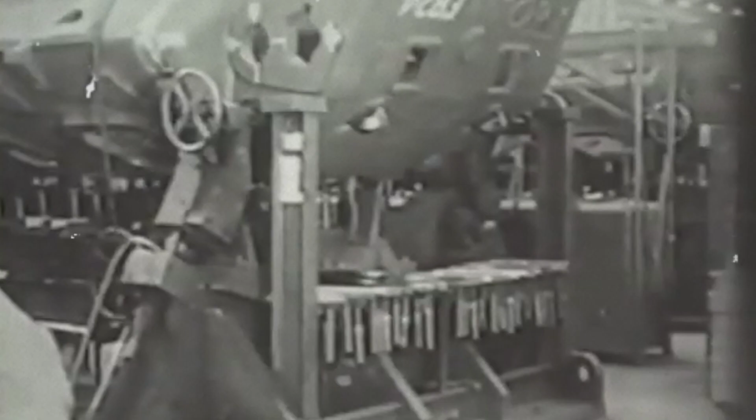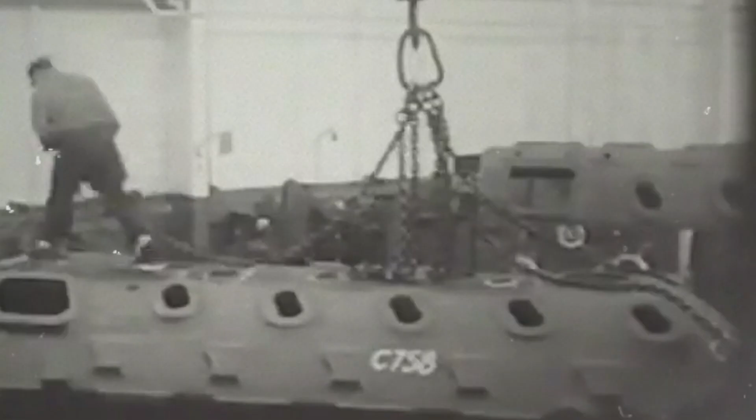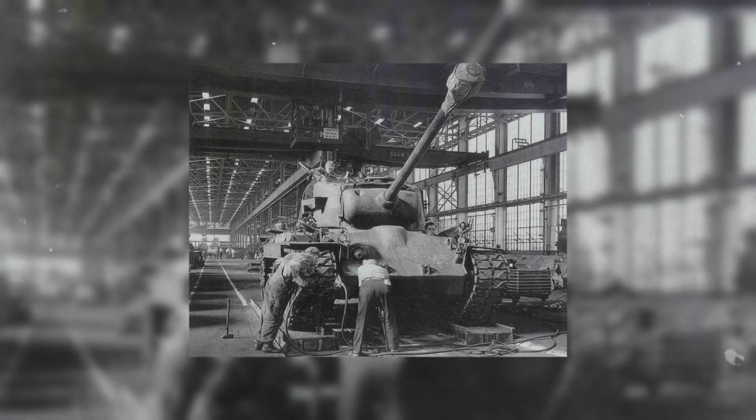July 1st, 2013. The final welding machines at the Grand Blanc facility powered down, leaving a deafening silence across 1.6 million square feet of concrete. There were no ceremonies, no grand farewells, just a padlock on the gate of a factory that once saved the free world.

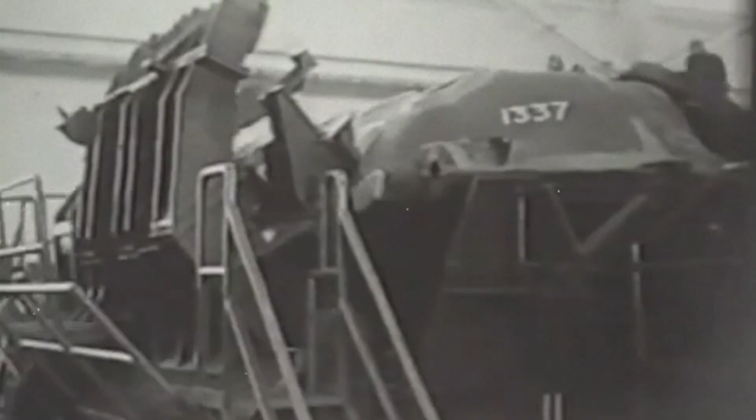Seven decades earlier, this exact ground was the beating heart of the arsenal of democracy. At the height of the Second World War, thousands of workers labored relentlessly to forge over 11,000 Sherman and Pershing tanks, turning the tide of global conflict. It was an unstoppable colossus of American manufacturing, providing generations of secure livelihoods.

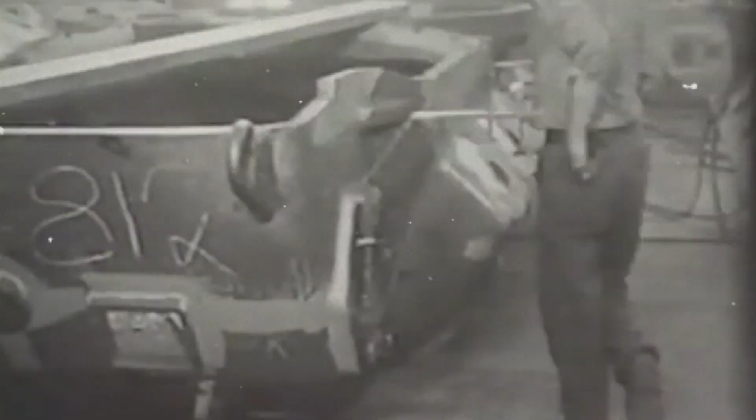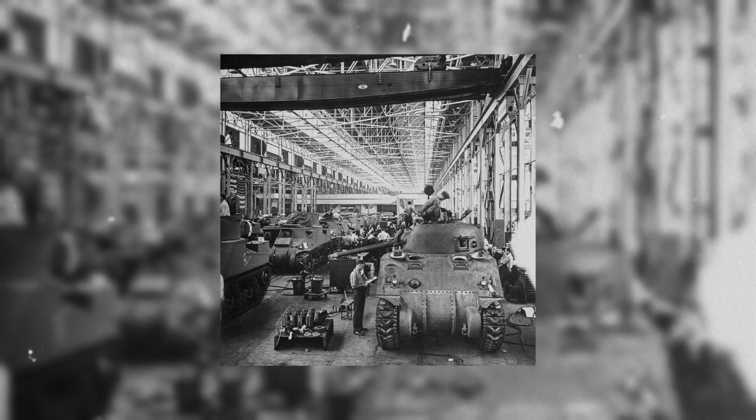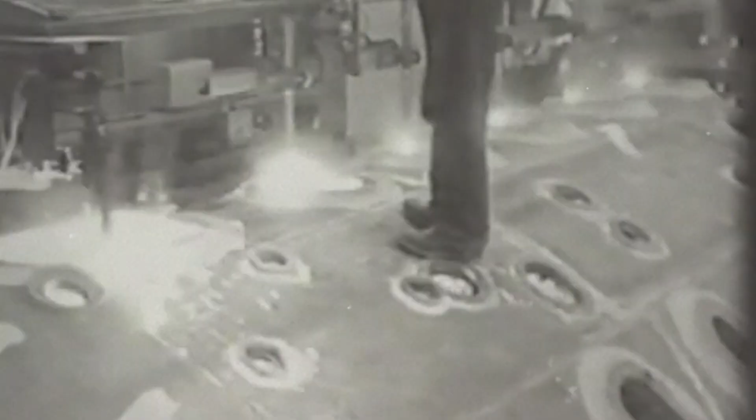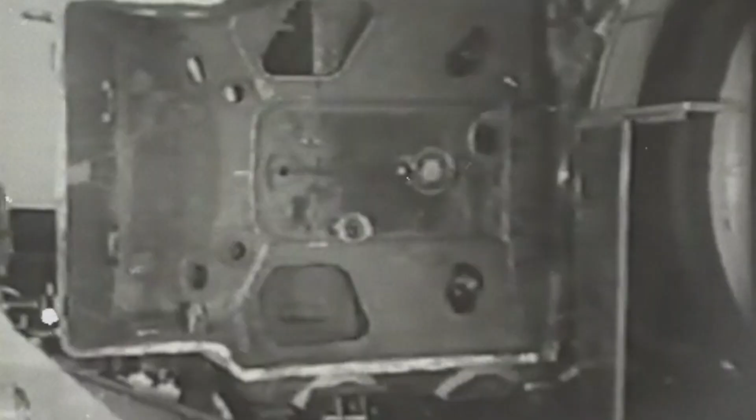Today, the legendary assembly lines have been erased. From thousands of skilled jobs, the employment roster plummeted in a devastating freefall to absolute zero. A fortress built to defend a nation was ultimately leveled to the ground, replaced by a barren commercial parking lot. How does an industrial titan that survived World War II, the Cold War, and decades of economic turbulence simply vanish? It wasn't destroyed by foreign artillery or global enemies. It was quietly executed by its own parent company, dismantled by a single corporate mandate to optimize profit margins.

Grand Blanc, Michigan, 1942 to 2013. This is the saga of an American manufacturing miracle, a story that reveals the brutal truth of what happens when a community's proudest legacy collides with the ruthless reality of a corporate balance sheet.

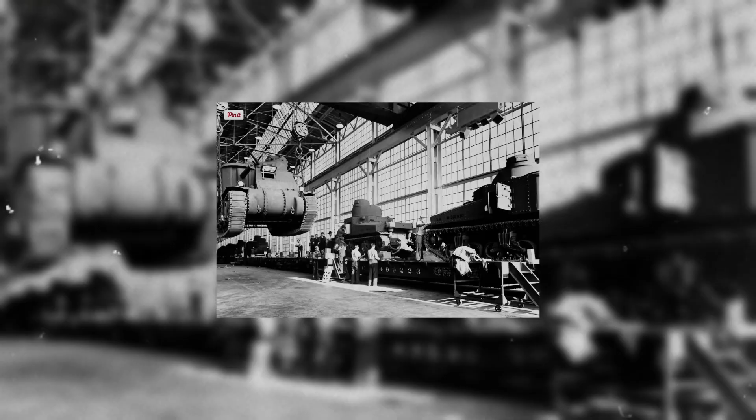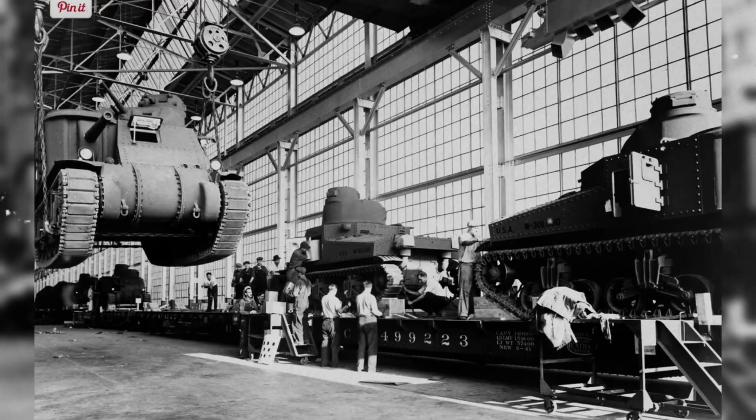In the final weeks of 1941, the wind howling across the rolling plains of Genesee County, Michigan, carried nothing but the biting cold of an approaching winter. Grand Blanc was a quiet, unassuming agricultural community, home to sprawling dairy farms, dirt roads, and families whose lives were dictated by the seasons and the harvest. For generations, the loudest sound echoing across these snow-dusted fields was the rumble of a distant freight train or the slow churn of a tractor. It was a place fundamentally disconnected from the geopolitical infernos raging across the Atlantic.

Yet beneath the serene, frost-covered surface of this rural landscape, an industrial metamorphosis of unprecedented scale was about to unfold. As the shadow of the Second World War lengthened over Europe, the United States government realized that its traditional military arsenals were dangerously inadequate. The mechanized blitzkrieg tactics that had rapidly dismantled European defenses required a response in kind, a massive, overwhelming mobilization of armored vehicles.

Washington recognized that the only force capable of producing complex machinery at such a staggering volume was the American automotive industry. The government turned its eyes toward Detroit, the undisputed manufacturing capital of the world, and specifically to General Motors. Within GM, the Fisher Body division, renowned for its precision engineering and mass production of automobile chassis, was handed an impossible mandate: stop building passenger cars and start forging 30-ton monsters of steel.

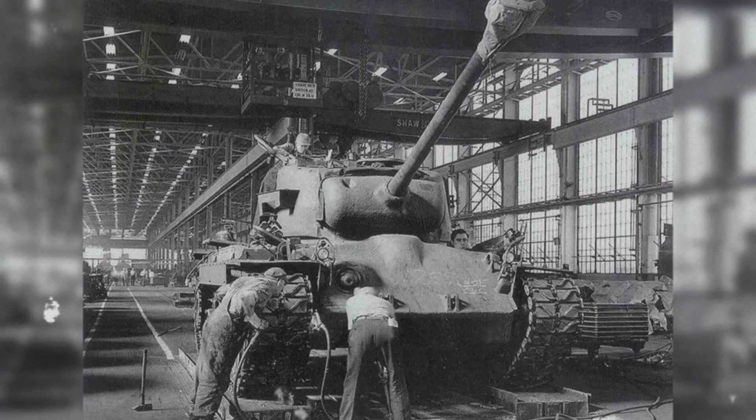After surveying multiple locations, General Motors and government planners settled on a vast tract of farmland in Grand Blanc. The location was strategic, offering hundreds of acres of open land necessary for a colossal building footprint and a private tank testing ground, while remaining closely connected to the deep industrial supply chains and railway networks of nearby Flint and Detroit. In November 1941, the first fleets of heavy earth movers and bulldozers arrived in Grand Blanc, tearing into the frozen topsoil. The initial construction schedule was already incredibly aggressive, driven by the looming threat of global conflict.

But on the morning of December 7, 1941, everything changed. The attack on Pearl Harbor shattered the illusion of American isolationism. The nation was suddenly at war, and the timeline for the Grand Blanc plant elevated from an urgent priority to a matter of desperate national survival.

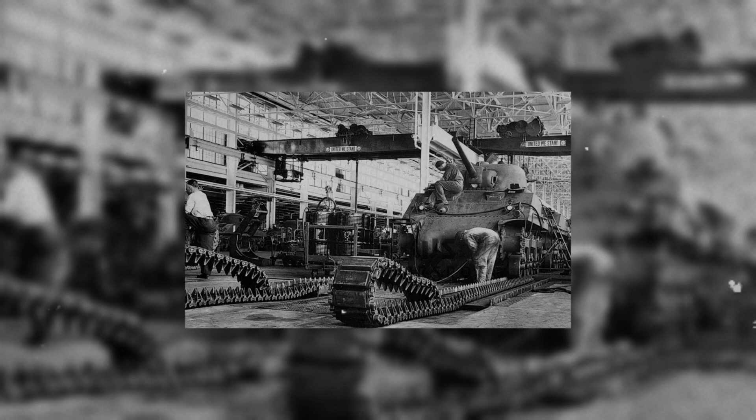Through one of the harshest Michigan winters in recent memory, construction crews worked around the clock in brutal, freezing conditions. Powerful floodlights illuminated the muddy, snow-swept construction site 24 hours a day, casting long shadows as thousands of laborers poured concrete and welded structural steel. They fought against blizzards, freezing temperatures that threatened to ruin the concrete foundation, and the constant crushing pressure of a wartime deadline. Yet the framework of an industrial titan began to rise against the gray winter sky.

The sheer scale of the undertaking was difficult for the local residents to comprehend. Where dairy cattle had grazed just months prior, a sprawling 452,000 square foot manufacturing complex was taking shape. The architecture was utilitarian, heavy, and imposing, designed not for aesthetics, but to withstand the immense internal forces of heavy industrial manufacturing.

Massive overhead cranes, capable of lifting entire tank hulls, were installed into the reinforced steel rafters. Deep concrete pits were excavated to house the heavy machinery needed to stamp and shape armored plating. By early 1942, an absolute miracle of American engineering and labor had been achieved. In a fraction of the time it would normally take to plan and build a facility of this magnitude, the Grand Blanc Tank Plant was structurally complete and ready for its internal tooling.

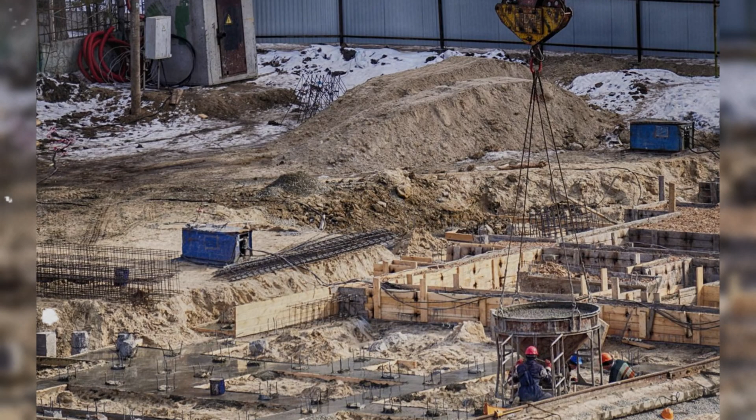The rural silence of the community had been permanently shattered. Freight trains now rumbled continuously down the newly laid spur tracks, delivering thousands of tons of raw steel, heavy machinery, and vital components. Simultaneously, a massive demographic shift occurred. As the factory doors prepared to open, thousands of workers descended upon the small town. They came from the automotive assembly lines of Flint, from the struggling farms of the Midwest, and from across the country, drawn by the call of wartime duty and the promise of steady wages. Men and women alike walked through the newly erected gates, ready to learn the dangerous and demanding trade of building war machines.

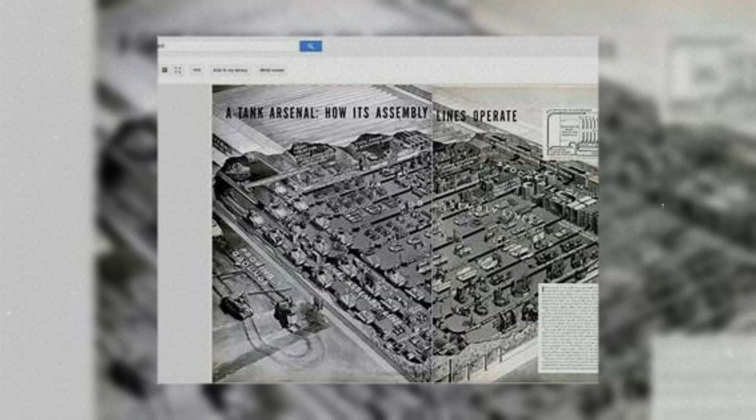The winter of 1941 to 1942 marked the permanent awakening of Grand Blanc. It was no longer just a farming community. It had been drafted into service as a vital organ in the arsenal of democracy. The stage was set, the massive electrical grids were powered up, and the heavy doors were unlocked. The quiet fields had been transformed into an industrial fortress, standing ready to forge the weapons that would soon dictate the fate of the free world.

The true test, however, was only just beginning as the first raw steel rolled onto the assembly floor. By the spring of 1942, the freezing mud of the Michigan construction site had solidified into the concrete floor of the free world's newest and most formidable armory. The Grand Blanc Tank Plant was no longer a hastily drawn blueprint. It was a living, breathing, mechanical behemoth.

Walking onto the production floor was an absolute assault on the senses. The cavernous air was thick with the acrid blue smoke of industrial welding and the heavy metallic scent of machine oil. The noise was a physical force, a relentless, deafening cacophony of drop hammers, grinding steel, and the synchronized shouting of foremen struggling to be heard over the industrial din. This was the Fisher Body Division, doing what it did best, but on a scale that defied all previous comprehension. General Motors had successfully transplanted the DNA of the automotive moving assembly line into the brutal calculus of mechanized warfare.

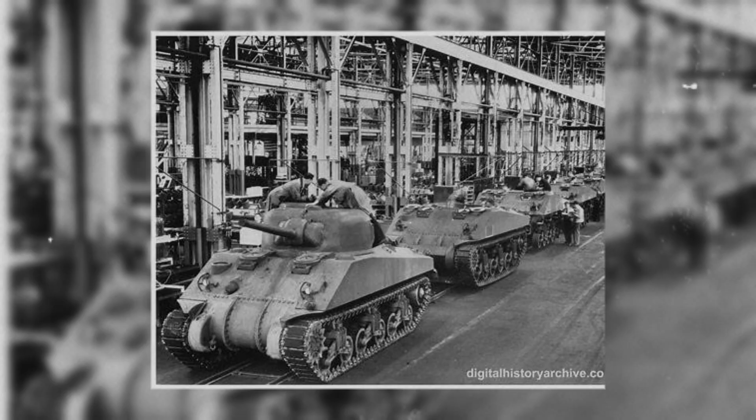At the center of this organized chaos was the M4 Sherman tank. Before Grand Blanc, tanks were often built in small batches, pieced together in specialized workshops like bespoke, deadly vehicles. The new facility changed the global paradigm entirely. Here, 30-ton monsters of steel were birthed in a continuous, flowing process. Giant overhead cranes hoisted massive cast steel hulls into place as if they were hollow toys.

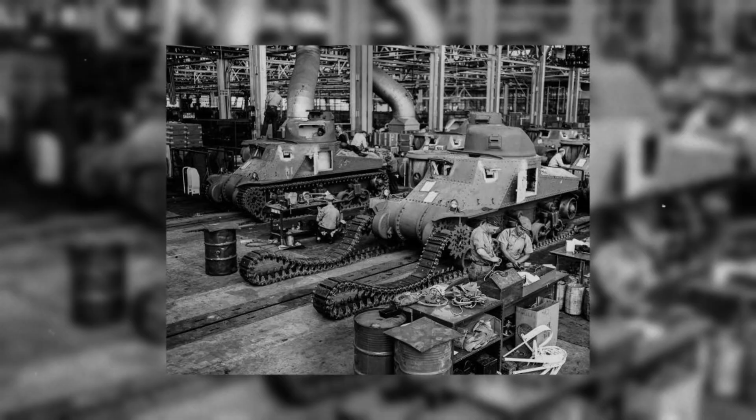As the chassis moved slowly down the line, a synchronized army of workers descended upon it. They dropped in massive radial engines, secured complex transmission assemblies, and lowered the heavy, rotating turrets onto their iron rings. It was an industrial ballet choreographed by desperation and driven by patriotism. The factory's unique layout allowed raw materials to enter at one end and fully functional, battle-ready war machines to roll out the other, straight onto waiting flatbed rail cars destined for the ports of the East Coast.

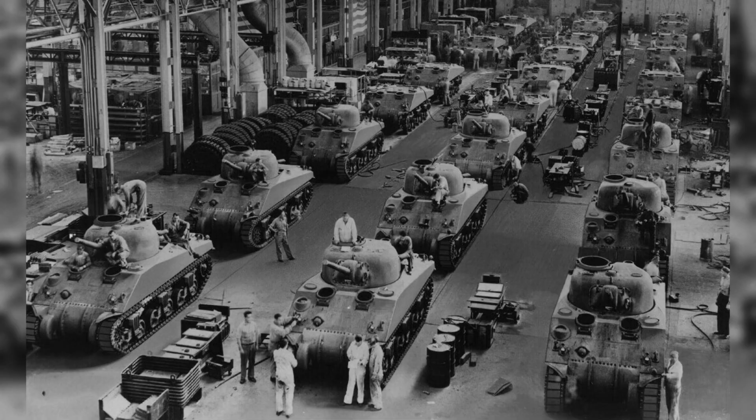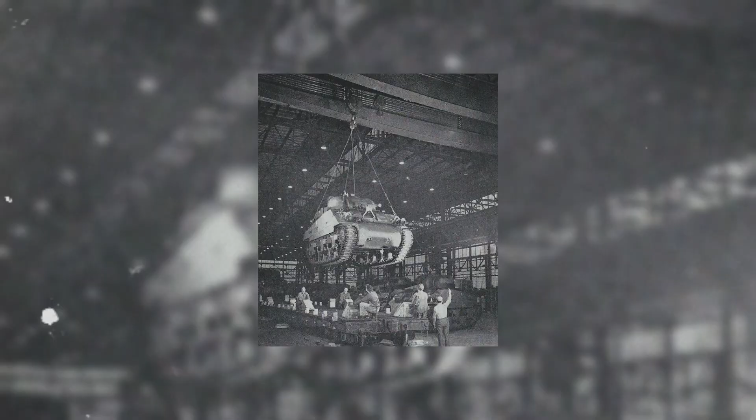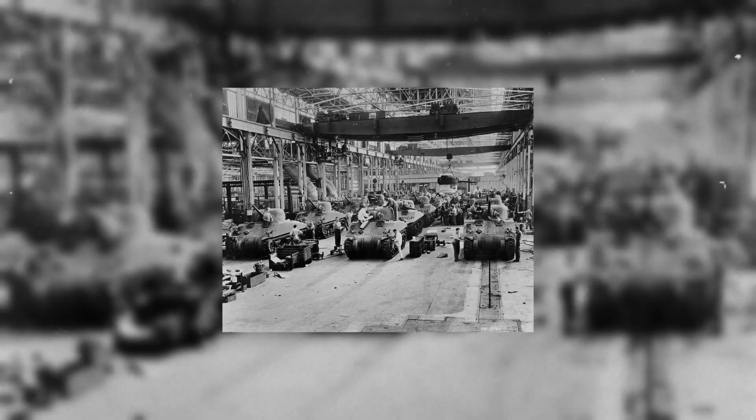But the true heartbeat of the Grand Blanc Tank Plant was not its machinery. It was the people who operated it. The insatiable demands of the global conflict had severely drained the traditional male workforce, pulling young men from the factory floors to the front lines. To fill the gaping void, the demographics of American manufacturing shifted practically overnight. Women, many of whom had never set foot inside a heavy industrial facility, answered the call in the thousands. They strapped on heavy leather aprons, pulled down protective welding masks, and picked up heavy riveting guns. They became the vital backbone of the arsenal of democracy.

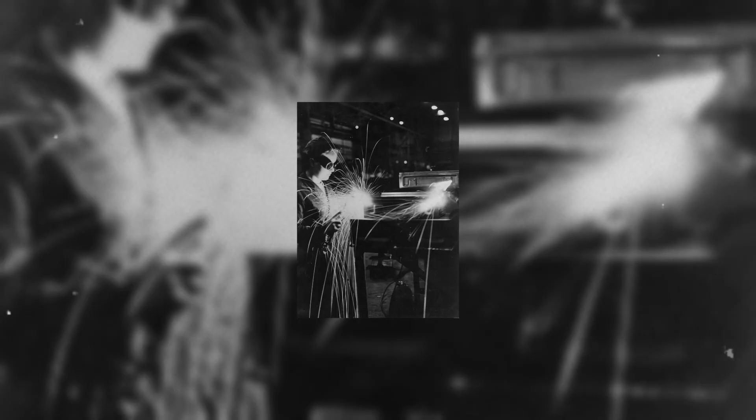Former shop clerks, farmhands, and housewives were suddenly tasked with executing precision welds on inch-thick armor plating, welds that absolutely had to hold together when struck by German artillery shells across the Atlantic. They worked grueling, 12-hour shifts, often 6 or 7 days a week, fueled by the stark realization that the lives of American soldiers depended directly on the quality of their daily labor.

As the war raged on, the battlefield reality in Europe shifted, and the plant had to pivot. Reports from the front lines indicated that the highly reliable Sherman was being outgunned by heavier, more heavily armored German tanks like the Panther and the Tiger. The military demanded a rapid response, and Grand Blanc delivered.

The plant's engineers and floor workers executed a staggering feat of industrial agility, retooling the massive assembly lines to produce the M26 Pershing, a heavier, wider tank with a devastating 90mm gun and significantly thicker armor. Switching production lines for passenger cars usually took months of careful planning and downtime.

Doing it for heavy tanks in the middle of a global war was a logistical miracle. Yet the workers adapted, wrestling with larger components and tighter tolerances without ever letting the assembly lines stop. By 1945, the factory had reached a crescendo of productivity that permanently cemented its legendary status in military history.

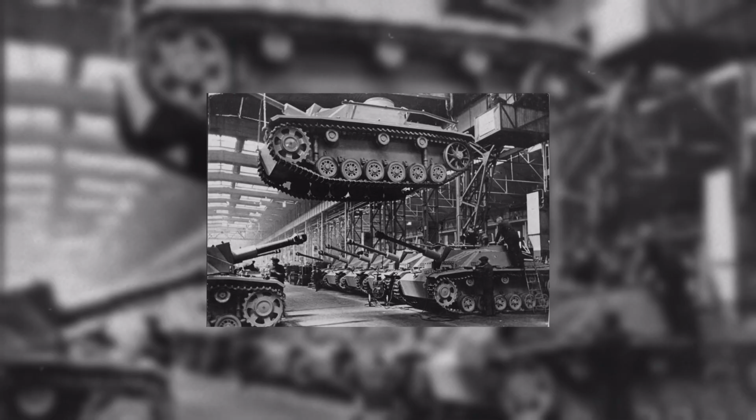The output numbers were staggering. From the moment the first tank rolled off the line to the final days of the conflict, the workers at Grand Blanc forged over 11,000 armored vehicles. If lined up bumper to bumper, this steel armada would stretch for miles. They had built enough armor to equip entire armies, single-handedly outproducing the combined industrial output of several Axis nations.

The facility had fulfilled its mandate flawlessly, transforming a quiet Michigan farming community into one of the most critical military-industrial nodes on the planet. But the very success of the Grand Blanc Tank Plant carried the seeds of an inevitable and immediate crisis. In August 1945, the devastating atomic explosions in the Pacific brought the Second World War to a sudden, dramatic end.

Across the nation, people flooded the streets in jubilation. But inside the cavernous walls of the Fisher body plant, the news brought a complex mixture of immense relief and profound anxiety. The government, suddenly lacking enemies to fight, instantly canceled billions of dollars in military contracts.

Within weeks, the deafening roar of the assembly lines began to falter. The massive moving tracks slowed, then stopped completely. The relentless influx of raw steel dried up. The thousands of men and women who had poured their sweat and sanity into building the arsenal were suddenly handed pink slips, their patriotic duty fulfilled, but their economic futures entirely uncertain.

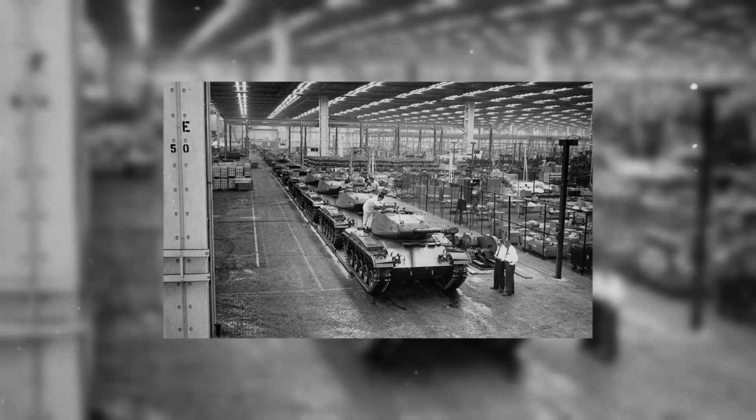The pivot was violent and immediate. The Buick spare parts were hastily cleared out, and the factory floor was radically reconfigured for a new era of mechanized conflict. The government tasked the plant with producing the M48 Patton, a formidable, state-of-the-art medium tank designed specifically to counter Soviet aggression. The M48 was heavier, more heavily armored, and vastly more complex than anything Grand Blanc had produced during the Second World War.

It featured a massive 90mm main gun, a newly designed precision suspension system, and an intricately cast elliptical hull intended to deflect advanced anti-tank munitions. The reawakening of the plant brought a wave of economic relief back to the community. The sprawling parking lots filled once again, and the familiar, deafening roar of industrial production returned to Genesee County.

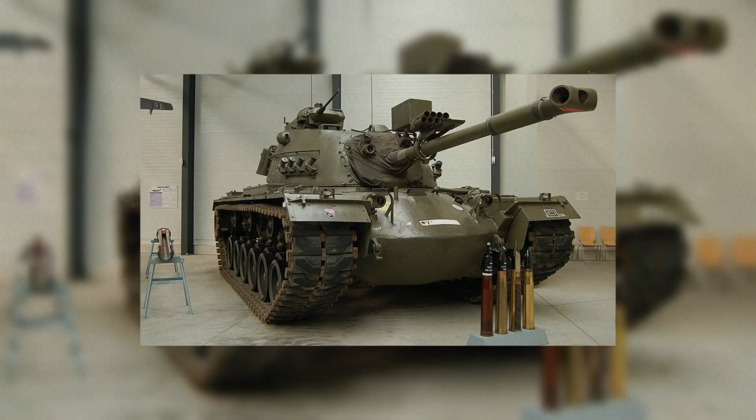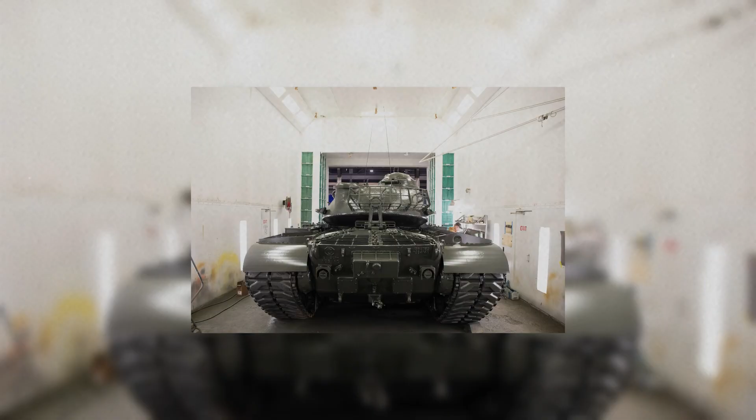Many of the veteran workers from the 1940s returned to the lines, their faces a little older, but their hands just as steady. They were joined by a new generation of welders, machinists, and assemblers, all united by a renewed sense of urgency. Over the next 5 years, the facility operated at a blistering pace, churning out an impressive armada of over 4,200 M48 Patton tanks. These machines rolled off the Grand Blanc assembly lines and directly into the tense, freezing battlefields of Korea, as well as onto the heavily fortified borders of West Germany, standing as the frontline deterrent against a potential Soviet invasion of Western Europe.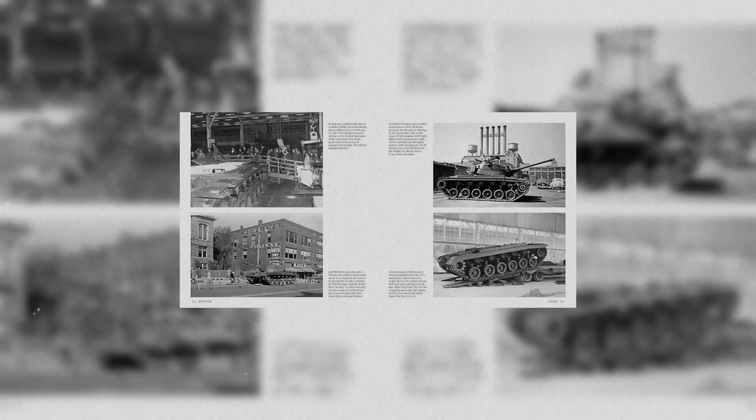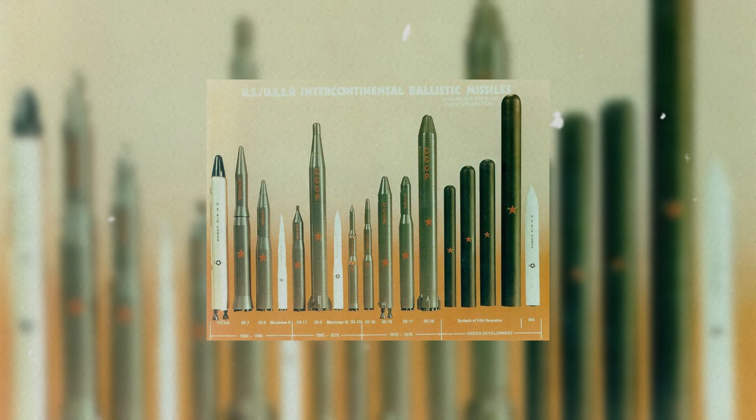Yet even as the production numbers soared and the facility proved its worth a second time, an invisible, strategic shift was quietly rendering the plant's core purpose obsolete. By the mid-1950s, the doctrine of global warfare was fundamentally transforming. The advent of thermonuclear weapons, intercontinental ballistic missiles, and advanced supersonic bombers shifted the Pentagon's focus away from massive, land-based armored engagements. The military-industrial complex was redirecting its vast resources toward the skies and the edge of space. The government realized it no longer needed to maintain a colossal, dedicated tank manufacturing facility operating at full capacity in Michigan.

In 1955, the fatal decree was handed down. Tank production at the Grand Blanc facility would be terminated. This time, there would be no temporary pause, no warehousing phase, no mass waiting for the next conventional conflict. The United States government was officially pulling its military vehicle contracts from the plant for good. For the second time in a decade, the massive assembly lines ground to a halt.

But this shutdown carried a far more existential dread for the thousands of workers clocking out. The facility was entirely specialized for military heavy manufacturing. Its electrical grids, its foundation weight limits, and its internal architecture were all engineered around moving 30 and 40-ton pieces of solid steel. It was a machine built exclusively to build machines of war. With the military permanently walking away, the Grand Blanc Tank Plant was plunged into a desperate crisis. It faced a stark and brutal ultimatum from corporate headquarters: execute a massive, prohibitively expensive structural metamorphosis to serve the civilian consumer market, or shut its doors forever, leaving its workforce stranded in the economic wreckage of the Cold War. The era of the tank was over, and the facility's fight for its own survival had just begun.

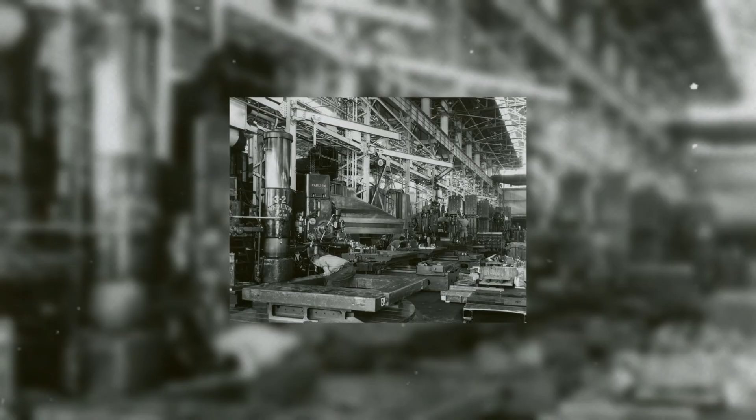In 1955, the Grand Blanc facility stood on the precipice of oblivion. The military had permanently severed its contracts, and the massive concrete floors were once again enveloped in a chilling silence. General Motors faced a critical crossroads: permanently shutter the sprawling complex and lay off thousands of loyal workers, or engineer a radical multi-million-dollar metamorphosis to adapt the factory for the booming post-war civilian economy.

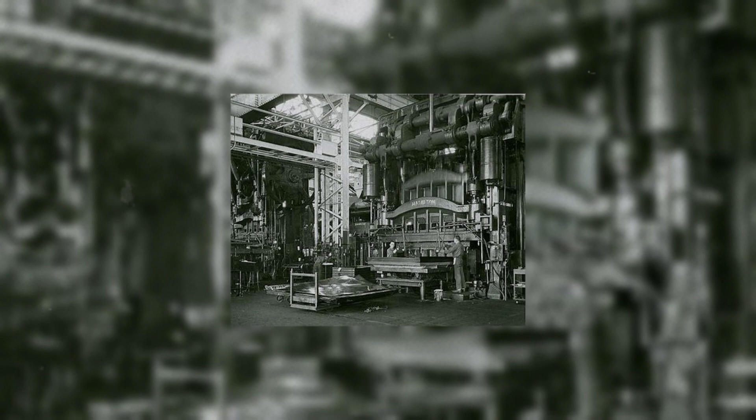The mid-1950s marked the dawn of the golden age of the American automobile. The nation was obsessed with speed, freedom, and the open highway. Consumers demanded larger, heavier, and more elaborately designed cars adorned with sweeping tail fins and acres of gleaming chrome. To feed this insatiable market, GM's Fisher Body division required an unprecedented volume of precisely molded steel. The corporation looked at the empty, reinforced shell of the Grand Blanc Tank Plant and made a decisive gamble. It would not be abandoned. It would be reborn as the mechanical heart of GM's domestic empire.

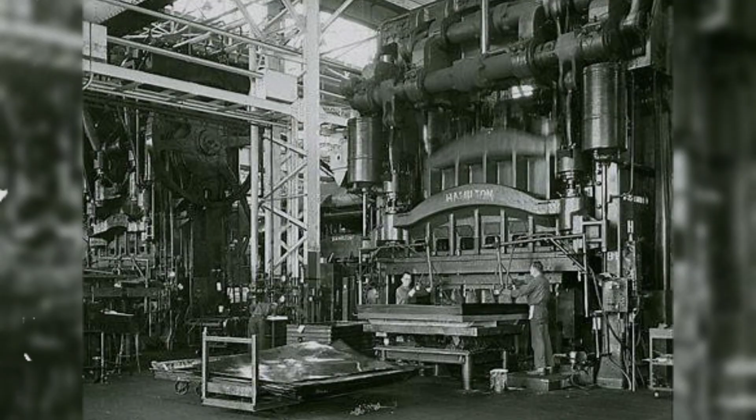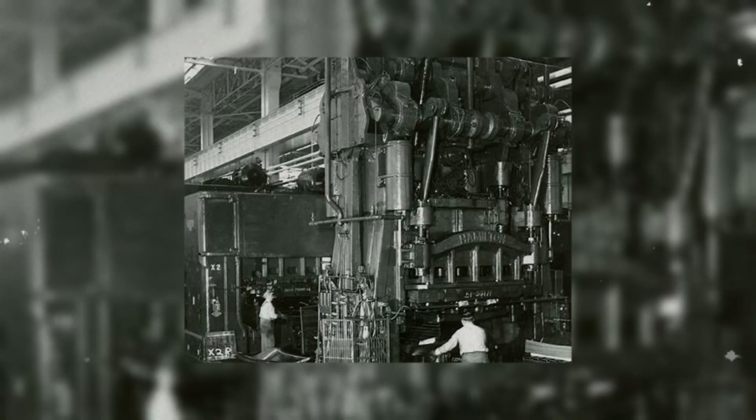The transformation from an arsenal to a civilian manufacturing hub was an engineering spectacle. The remnants of heavy tank production, the turret rings, the armor plating jigs, and the heavy artillery hoists were ruthlessly ripped out and scrapped. In their place, contractors poured deeper, more heavily reinforced concrete foundations, preparing the earth to support a new kind of industrial monster: the mechanical stamping press. These presses were architectural marvels in their own right, towering machines that stood stories high and extended deep into subterranean pits. They were designed to take flat, heavy sheets of raw steel and smash them into complex aerodynamic shapes: hoods, fenders, doors, and roof panels in a single, violent motion.

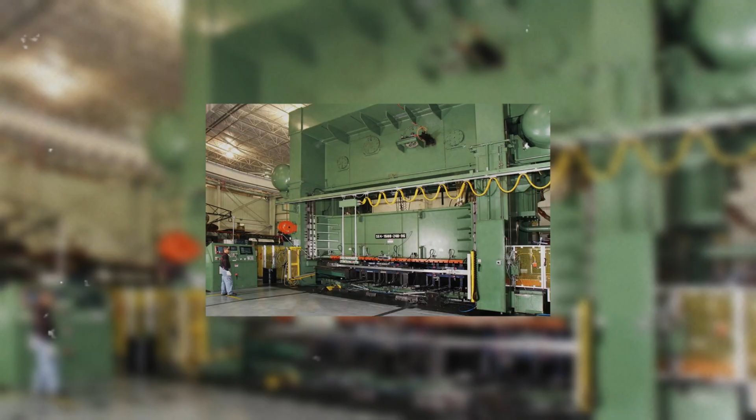When the newly christened Grand Blanc stamping plant finally powered up its new lines, the sensory experience of the factory was fundamentally altered. The chaotic, grinding cacophony of tank assembly was replaced by a synchronized, rhythmic, and terrifyingly powerful mechanical heartbeat. When a line of major stamping presses cycled in unison, the impact generated thousands of tons of blunt force. The ground physically shuddered. The deep, concussive thuds reverberated through the soles of the workers' boots and echoed across the surrounding town. It was the undeniable sound of American economic supremacy.

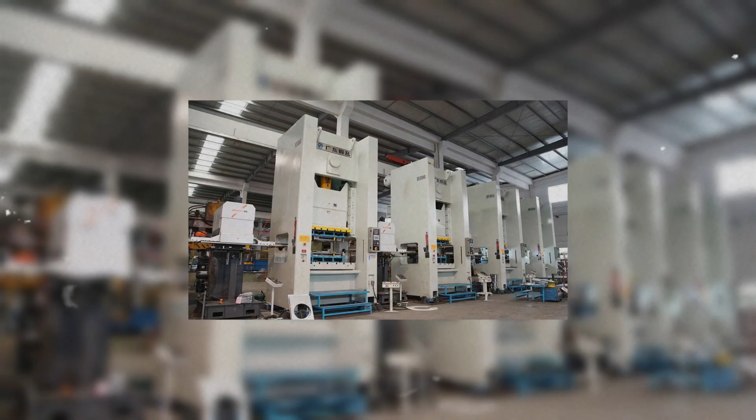This rebirth triggered a massive physical expansion. Over the ensuing years, the footprint of the facility ballooned outward, swallowing up more of the surrounding fields until it reached a staggering 1.6 million square feet of covered manufacturing space.

It became a sprawling, self-contained industrial city. The workforce swelled once again, not with wartime draftees, but with career auto workers. Under the powerful banner of the United Auto Workers Union, the men and women operating these massive presses secured wages, health care, and pensions that defined the peak of the American middle class.

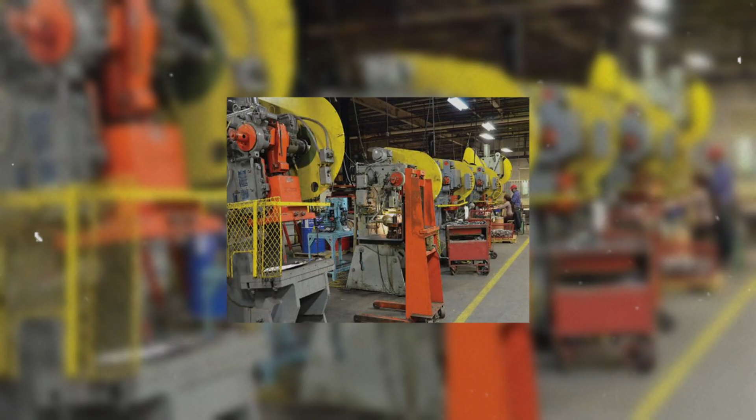A job at the Grand Blanc stamping plant meant purchasing a home, sending children to college, and perhaps buying a cabin by a Michigan lake. The factory had successfully cheated death, trading the volatile business of warfare for the seemingly infinite prosperity of the open road.

By the late 1960s and early 1970s, the Grand Blanc stamping plant had ascended to its absolute zenith. It was an indispensable node in the vast, globe-spanning General Motors empire. Trainloads of heavy coil steel rolled into the loading docks continuously, and an endless river of perfectly stamped body panels flowed out, destined for assembly plants in Flint, Detroit, and across the nation.

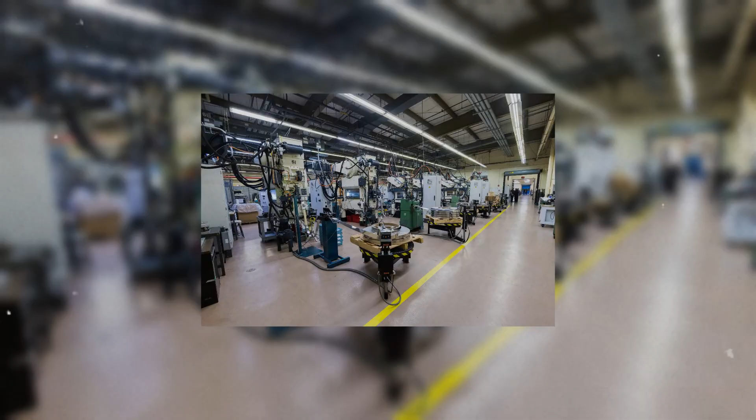The facility operated around the clock in 3 brutal, high-intensity shifts. The parking lots were oceans of gleaming Detroit-built steel, and the internal culture of the plant thrived. It had its own cafeterias, internal newsletters, sports leagues, and an intricate social hierarchy.

To the outside observer, and indeed to the executives sitting in the distant boardroom of the GM building in Detroit, the stamping colossus appeared utterly invincible. However, beneath the surface of this historic peak, a slow and invisible rot was beginning to take hold.

The very success of the Grand Blanc facility and of General Motors as a whole bred a dangerous and pervasive corporate arrogance. The prevailing philosophy of the era was notoriously summarized as, 'What is good for General Motors is good for the country.' This supreme confidence fostered a culture of complacency.

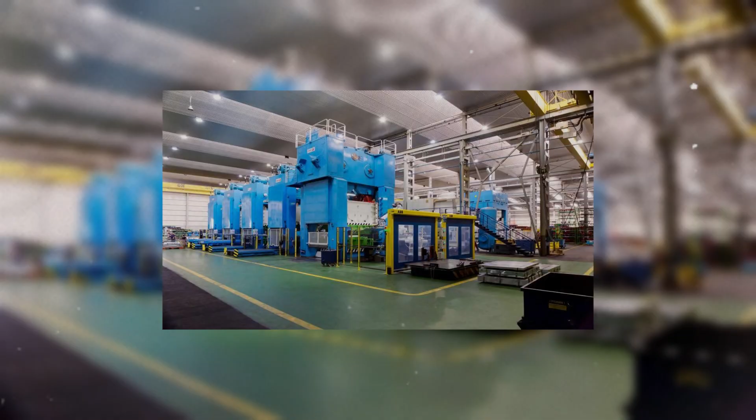The massive stamping presses at Grand Blanc were a marvel of mid-century engineering, but they were incredibly rigid. They were optimized for one specific philosophy: high-volume, high-speed production of large, heavy, uniquely American car parts. Retooling these giant dies for new, innovative designs was an expensive, agonizingly slow process that management was increasingly reluctant to undertake.

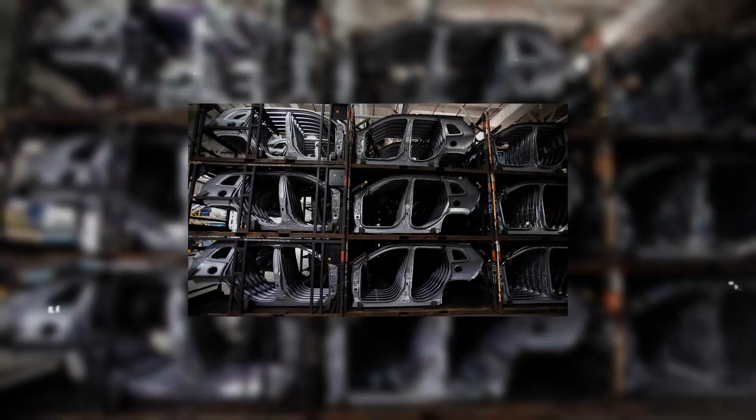The first major tremors of the impending collapse arrived with the oil crisis of 1973. Overnight, the American consumer's appetite for massive, fuel-thirsty V8 sedans evaporated. Long lines at the gas pumps sparked a sudden, desperate demand for smaller, lighter, and more fuel-efficient vehicles.

Suddenly, the Japanese and European automakers, who had spent decades quietly perfecting lean, agile, and efficient manufacturing systems, aggressively entered the American market. General Motors was caught entirely off guard.

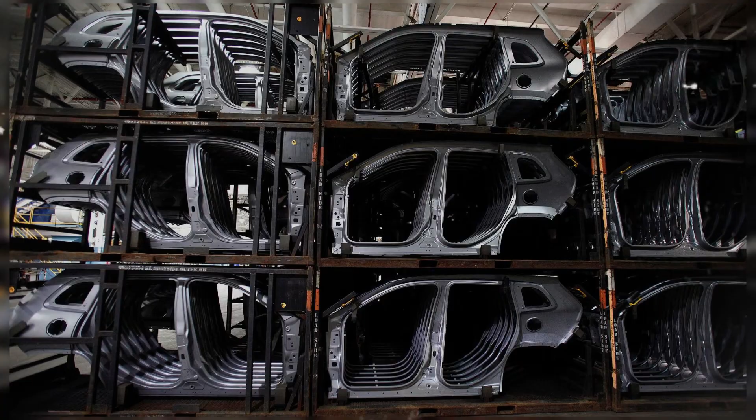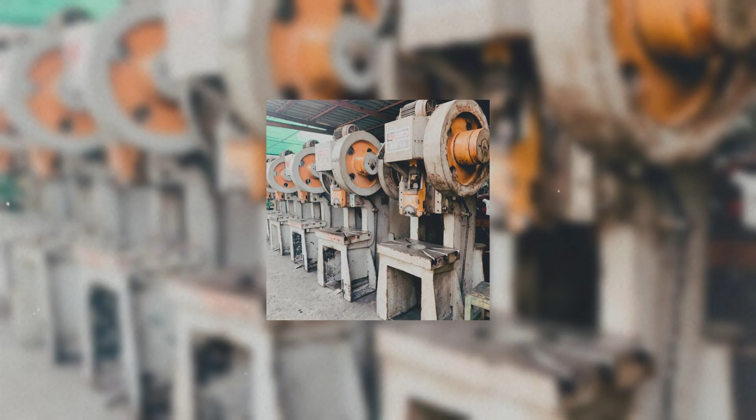The giant of Grand Blanc, perfectly engineered to stamp out massive steel hoods for Chevrolet Impalas and Buick Electras, could not easily or cheaply pivot to producing lightweight components for compact cars. The corporate bloat, the layers of middle management, and the increasingly tense adversarial relationship between the executives and the powerful labor unions paralyzed the company's ability to adapt.

As the 1970s bled into the 1980s, the once unstoppable flow of orders began to slow. The deafening, rhythmic thud of the presses, the heartbeat of the local economy, began to skip beats. Foreign competition was no longer a distant nuisance. It was an existential threat pulling up right to the factory gates.

The seeds of destruction, planted during the height of the facility's greatest arrogance, were finally beginning to sprout, setting the stage for a prolonged and painful era of decline.

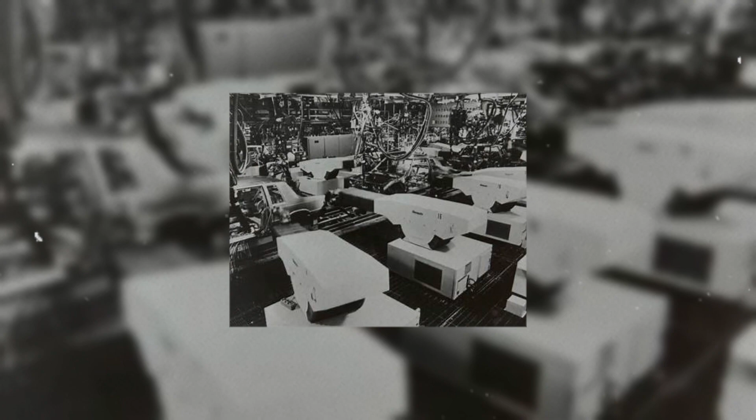The dawn of the 1980s brought a cold, unforgiving reality to the American Midwest. The economic tremors that had begun in the 1970s with the oil embargoes were no longer temporary disruptions. They had solidified into a permanent structural shift in the global automotive landscape.

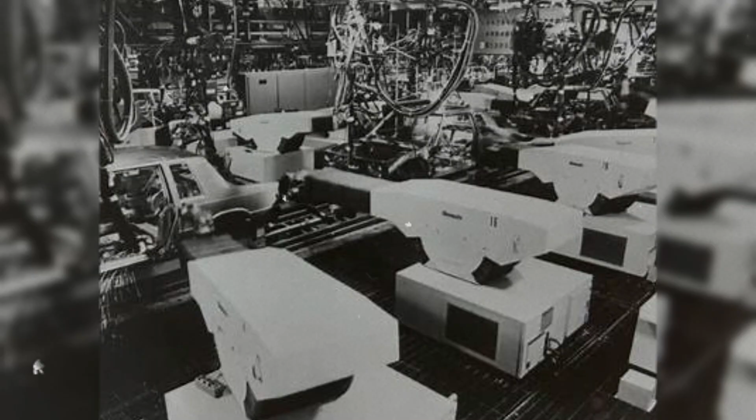The American consumer had changed. Stung by volatile gas prices and frustrated by declining domestic reliability, buyers were turning away from the massive, heavy sedans that Detroit had built its empire upon.

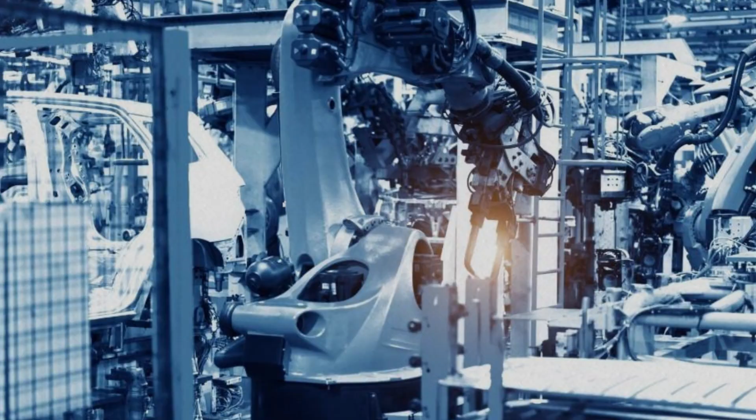Instead, they were flocking to showrooms, selling Hondas, Toyotas, and Nissans. These foreign competitors offered vehicles that were smaller, remarkably fuel efficient, and manufactured with a lean, precise efficiency that the bloated American auto industry simply could not match.

Inside the Grand Blanc stamping plant, this global shift manifested as a creeping, existential dread. The colossal stamping presses, which had once violently formed the sweeping steel curves of the 1960s golden era, were now struggling to adapt to the tight, economical designs required for the new decade.

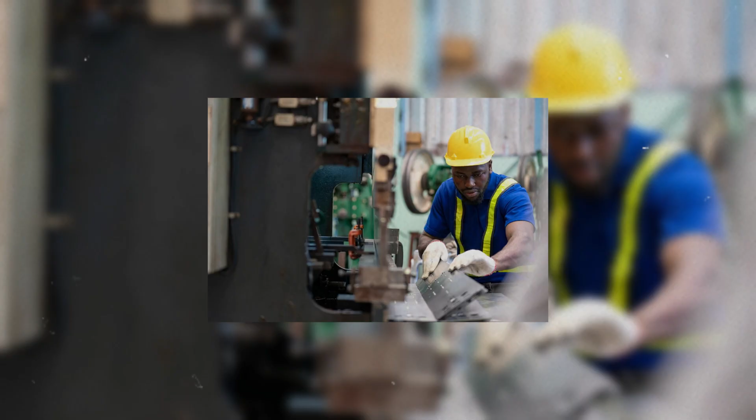But the mechanical challenges were entirely overshadowed by a profound crisis of identity that was about to strike the very heart of the workforce. Since its inception, the Grand Blanc facility had operated under the banner of the Fisher Body Division. Within the vast, often chaotic hierarchy of General Motors, Fisher Body was a legendary institution.

Originally an independent coach builder founded by the Fisher brothers in the early 20th century, it had been fully absorbed by GM, but had fiercely maintained its own distinct culture, management style, and intense pride. The Body by Fisher emblem, featuring a classic Napoleonic carriage, was affixed to the door sills of millions of vehicles, symbolizing a standard of craftsmanship that the workers at Grand Blanc took immense personal pride in. They didn't just work for GM, they were Fisher Body men and women.

However, in the mid-1980s, the executive leadership at General Motors, spearheaded by Chairman Roger Smith, looked at the company's plummeting market share and decided that drastic corporate restructuring was the only path to survival. The deeply entrenched semi-autonomous divisions like Fisher Body were viewed by the Detroit boardroom not as assets of quality, but as layers of redundant bureaucracy that were slowing the company down and bleeding profits.

In 1986, the fatal blow was struck. General Motors officially dissolved the Fisher Body division. After nearly 7 decades of defining American automotive craftsmanship, the legendary mark was completely wiped from the corporate ledger.

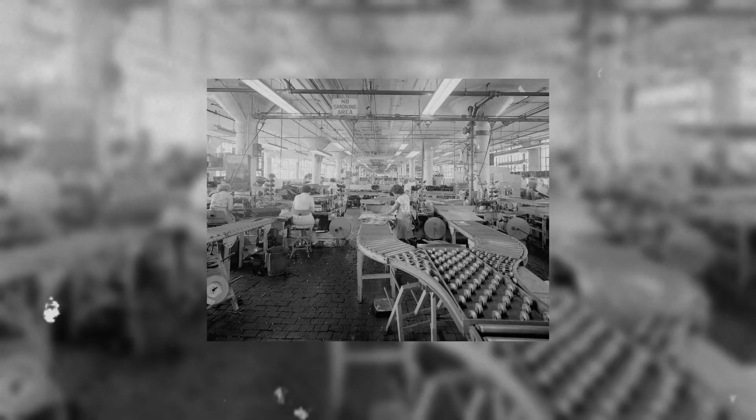At Grand Blanc, the psychological impact was devastating. The iconic Body by Fisher signs were unceremoniously pulled down from the factory facades. Decades of institutional memory, fierce divisional loyalty, and a deeply ingrained culture of quality were erased by a single boardroom decree. The workers were no longer part of an elite guild of coach builders.

They were simply numerical assets in a struggling, monolithic corporation trying to stop the bleeding. Stripped of its foundational identity, the Grand Blanc facility was thrown into a dizzying era of corporate musical chairs. Without the protective umbrella of Fisher Body, the massive 1.6 million square foot plant became a pawn in General Motors' frantic attempts to reorganize itself back to profitability.

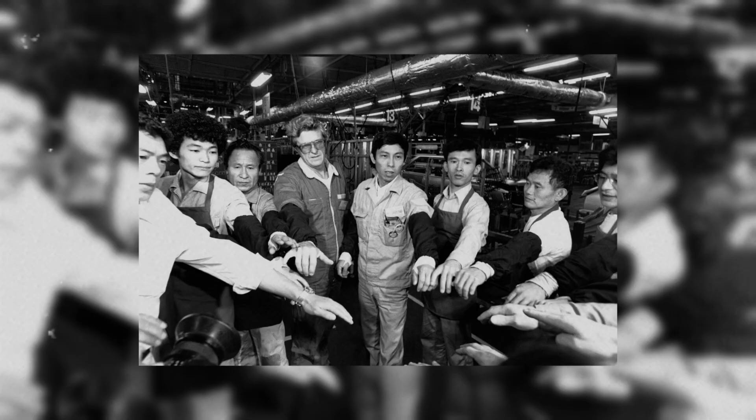Over the next decade, the facility was bounced from one newly invented corporate group to another. First, it was absorbed into the unwieldy Buick Oldsmobile Cadillac, BOC Group. When that structure failed to yield the desired efficiencies, the plant was shifted under the Cadillac luxury car division, and later, the grandly titled but creatively bankrupt metal fabricating division.

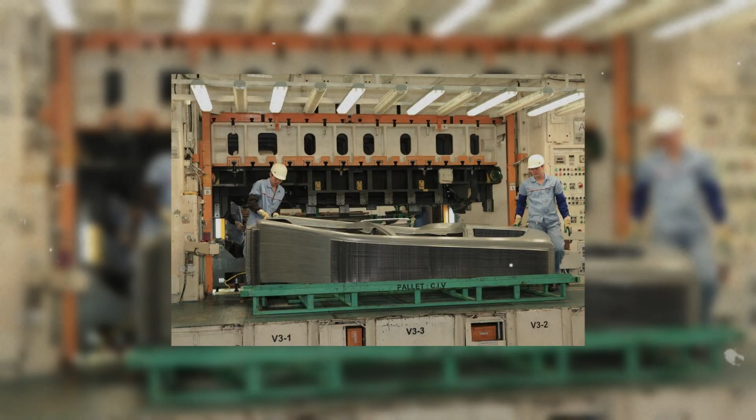With every change of the sign on the front gate came a new wave of middle management, a new set of contradictory production philosophies, and a renewed mandate to ruthlessly cut costs. The boardroom had realized that they could not easily out-innovate their foreign rivals, so they decided they had to out-cut them. The era of the blank check was over. The era of the spreadsheet had arrived.

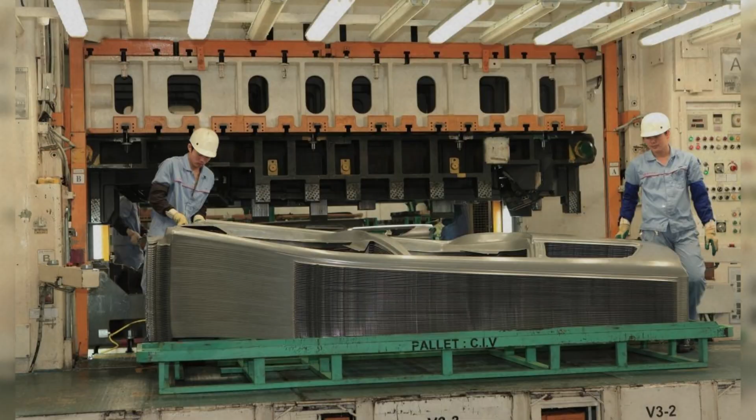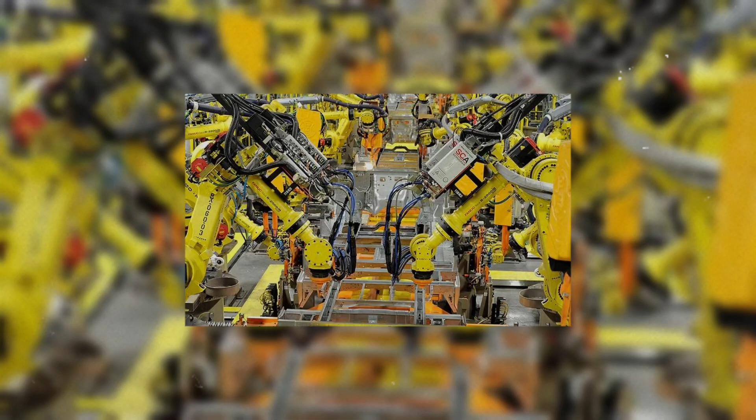This relentless drive for efficiency ushered in the most terrifying threat the workers had ever faced: automation. To compete with the hyper-efficient Japanese factories, GM began investing heavily in robotics. Inside Grand Blanc, the dark, oily aisles where hundreds of men and women used to wrestle heavy steel panels into welding jigs were suddenly occupied by towering, yellow mechanical arms.

These robots did not require pensions, they did not take breaks, and they did not belong to the United Auto Workers Union. While automation was undeniably necessary to keep the company globally competitive, it directly severed the livelihood of the local community. The consequences were immediate and painful. The late 1980s and early 1990s witnessed the first major waves of permanent layoffs. The parking lots, which once required careful navigation to find a spot across 3 bustling shifts, began to show expansive, empty patches of faded asphalt.

Inside the plant, the atmosphere grew tense and bitter. The powerful camaraderie that had defined the Fisher Body days was replaced by a pervasive paranoia. Workers with decades of seniority watched nervously as the lines they had operated for years were dismantled or automated.

The union halls in Genesee County, once the sites of triumphant rallies and powerful contract negotiations, transformed into somber centers of crisis management. Local leaders fought desperately to save jobs, but they were negotiating against an inevitable tide of technological advancement and corporate desperation. The Grand Blanc stamping plant was surviving, but it was surviving by cannibalizing its own workforce.

The colossal facility was slowly rusting from the inside out. It was no longer a symbol of limitless American prosperity. It had become a grim battlefield where human loyalty and historical legacy were locked in a losing war against automation and the merciless demands of a globalized economy.

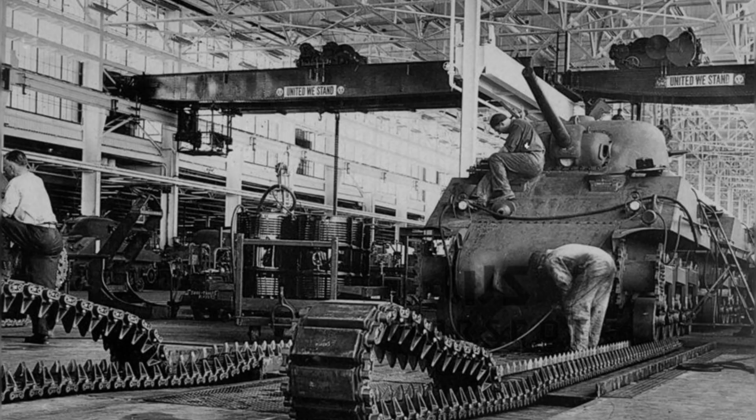It was the largest industrial bankruptcy in United States history, a catastrophic financial event that sent a shockwave of terror through every community tethered to the automaker. For the 400 remaining workers at the Grand Blanc Weld Tool Center, the news was a localized apocalypse. They gathered in the sparsely populated break rooms, their eyes glued to small television screens as the federal government essentially took control of their employer.

Their livelihoods were no longer in the hands of their immediate supervisors or even the executives in Detroit. They were entirely at the mercy of federal task forces and bankruptcy judges tasked with ruthlessly carving out the diseased portions of the corporate body.

During the chaotic, fiercely debated restructuring process, General Motors was surgically split into two distinct entities. The profitable brands and modern assets were placed into a new, federally backed company known as New GM, while the toxic, unwanted liabilities, including dozens of outdated factories, contaminated land, and unpayable debts across the Rust Belt, were dumped into an entity called the Motors Liquidation Company.

Every single day, the workers in Grand Blanc arrived at their isolated stations, navigating the dark, echoing corridors of the plant, carrying the excruciating tension of waiting for the corporate guillotine to fall. The facility was an obvious target on the balance sheet. Heating, maintaining, and paying property taxes on a 1.6 million square foot building to house merely 400 workers was a masterclass in corporate inefficiency.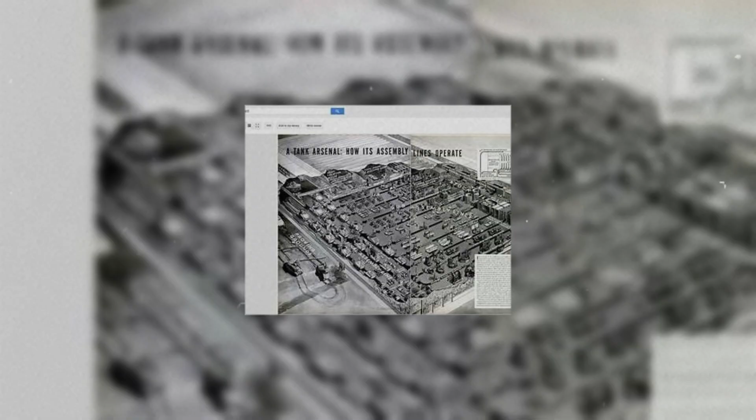Miraculously, by a stroke of logistical necessity, the Grand Blanc facility initially survived the massive 2009 purge. The highly specialized, irreplaceable skills of its remaining toolmakers were deemed temporarily necessary to support the launch of a new generation of vehicles that GM desperately needed to orchestrate its miraculous comeback.

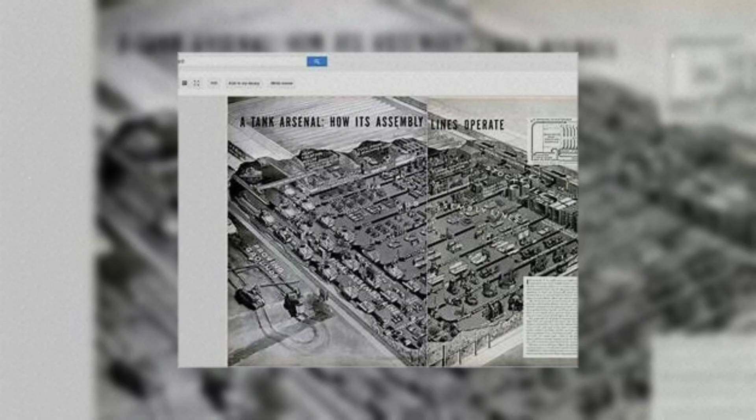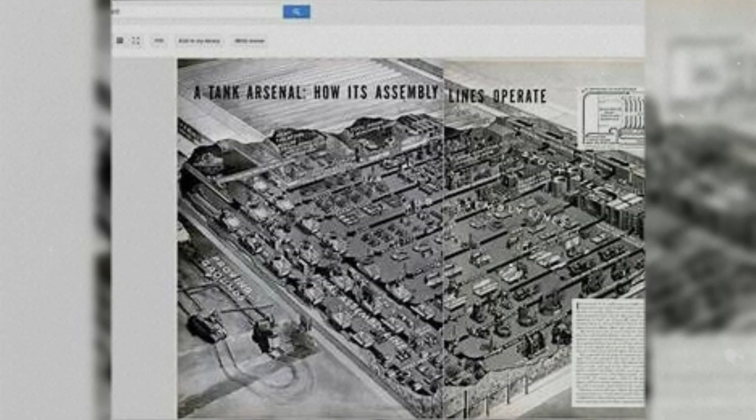But no one on the floor was under any illusion. This reprieve was universally understood to be a temporary, fragile stay of execution. The factory was a decaying relic of a bygone era. The mythical aura of the arsenal of democracy, the history of Sherman tanks, and the golden age of the Fisher body era offered absolutely no protection against the cold, unfeeling arithmetic of modern corporate restructuring.

The plant had been entirely hollowed out, its original purpose stripped away, and its legacy mortgaged to pay off the sins of the past. It was merely lingering on life support, a ghostly colossus standing quietly in the Michigan winter, waiting inevitably for the executives in Detroit to finally pull the plug.

The fragile reprieve granted during General Motors' historic bankruptcy restructuring could only last so long. As the corporation stabilized and began to aggressively look toward a leaner, highly centralized future, the massive, drastically underutilized footprint in Grand Blanc became impossible to justify to Wall Street.

The final, fatal blow did not arrive with the dramatic urgency of a wartime telegram, nor did it come with the roaring chaos of a sudden economic crash. It came as a sterile, calculated corporate memo. In January 2013, General Motors officially announced the impending permanent closure of the Grand Blanc Weld Tool Center. After 71 uninterrupted years of manufacturing everything from heavy battlefield armor to the intricate tooling of the modern automotive age, the facility's legendary run was officially over.

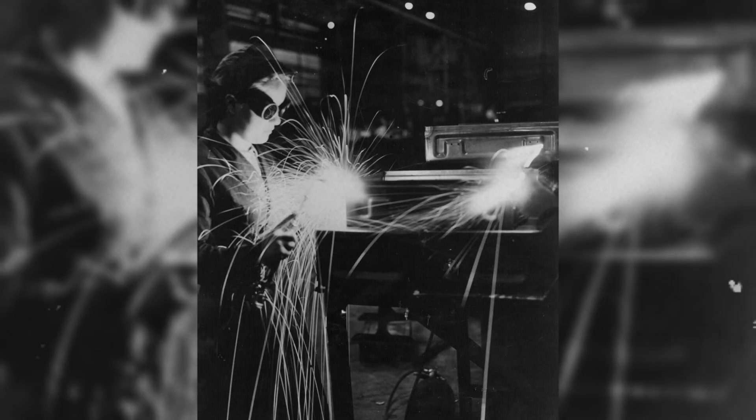There were no marching bands, no speeches from high-ranking Detroit executives, and no grand ceremonies to honor the end of an era that had fundamentally shaped the global century. The weather outside was typical for a Michigan summer, but inside the heavy steel doors, the atmosphere was thick with an indescribable, suffocating finality. The remaining crew clocked in for the absolute last time, swiping their badges and walking past the exact same security gates their grandfathers might have passed through during the frantic height of the Second World War.

The tasks for the day were entirely minimal. There were no more production quotas to meet, no more emergency repairs to execute, and no future models to prepare for. The singular focus was on shutting down the remaining infrastructure safely. Highly skilled technicians moved methodically through the designated zones, executing the final shutdown protocols.

The sharp hiss of compressed air lines being bled dry echoed sharply against the distant empty walls. Massive electrical sub-panels were switched off one by one, plunging large, historic swathes of the facility into a permanent, unbroken darkness. The sensory experience of the plant's death was deeply unsettling to witness. A factory of this magnificent scale is akin to a living organism. It breathes through its massive ventilation systems.

It vibrates constantly with high-voltage electrical current, and it communicates through the rhythmic, mechanical cycling of machinery. As the veteran workers walked down the desolate lines, pulling the heavy, industrial disconnect switches, they were essentially stopping that heartbeat. By the late afternoon, the final robotic welding cell was formally powered down. The heavy hydraulic pump spun to a halt, letting out a long mechanical sigh before falling completely, irreversibly, silent.

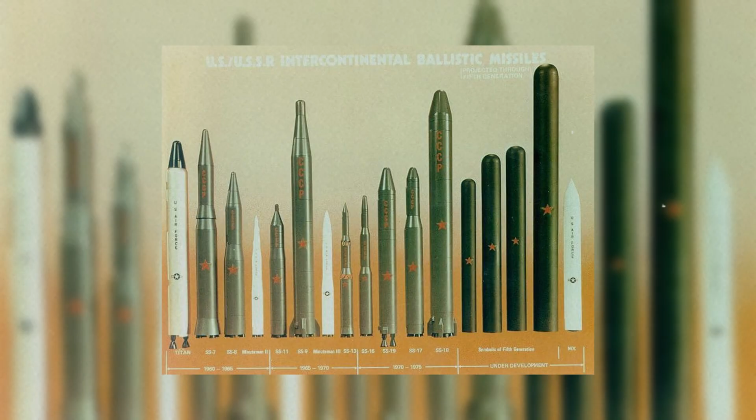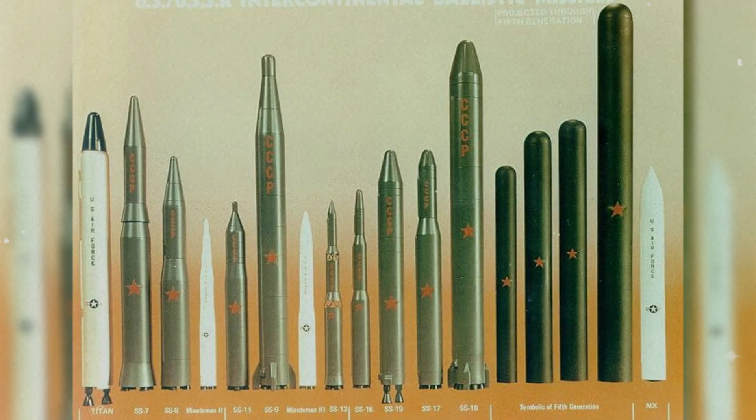The most profound, symbolic decapitation of the facility came with the felling of the factory's towering water tower. For over half a century, the massive steel structure bearing the faded, unmistakable logo of General Motors had dominated the Grand Blanc skyline. It was the visual heartbeat of the town, a landmark that guided travelers and reassured residents that the colossal economic engine of their community was still standing watch.

When the demolition crews finally cut the tower's legs, it groaned and toppled to the earth with a thunderous, earth-shaking crash. A dense cloud of dirt and rust billowed into the air, and when it finally cleared, the horizon was permanently altered. By the end of 2015, the structural skeletons were entirely gone.

The deep, subterranean press pits that had once violently formed the sweeping curves of mid-century American automobiles were filled in with the pulverized remains of the factory's own concrete foundation. The land was aggressively scraped, graded, and flattened. Where a 1.6 million square foot titan of global manufacturing had stood just two years prior, there was now only a massive, unnatural void. The physical erasure was absolute and complete.

The giant had not simply died. It had been wiped from the face of the earth, leaving behind a jarringly empty expanse of dirt that seemed far too quiet for a place that had once roared with the deafening sound of history.

Today, if you drive down South Saginaw Street in Grand Blanc, Michigan, looking for the physical remnants of the arsenal of democracy, you will find nothing but a jarring, unremarkable expanse of asphalt and commercial development. The monumental 1.6 million square foot fortress of steel and concrete that once dominated the local horizon has been entirely replaced by a sterile, modern landscape.

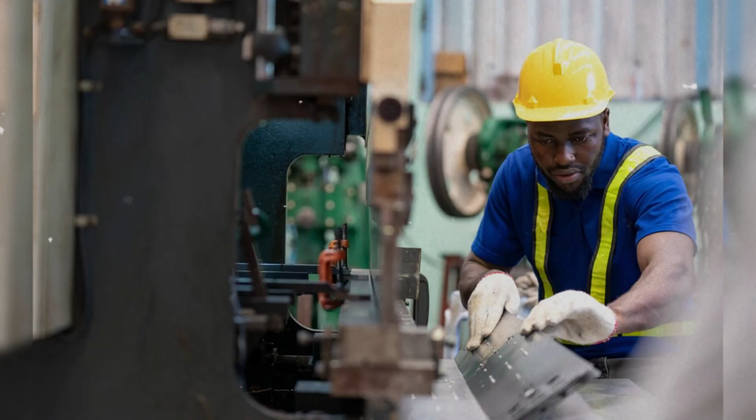The true vulnerability of these colossal entities does not come from foreign adversaries, physical decay, or technological impossibilities. It comes from the cold, detached arithmetic of the corporate ledger. When a community tethers its absolute prosperity and its deeply held identity to a single corporate entity, it makes a dangerous wager. The men and women of Fisher Body poured their lives, their health, and their professional pride into the concrete foundation of that facility.

They were told they were the arsenal of democracy, the undisputed beating heart of the American middle class. But a corporation, no matter how iconic or historically significant, possesses no memory. It has no conscience, and it holds no loyalty. It only has shareholders, balance sheets, and quarterly earnings reports. When the math no longer made sense, 71 years of profound national service and generational sacrifice were erased with a single padlock and a fleet of demolition excavators.

The empty commercial lot that now sits on South Saginaw Street is a stark monument to this modern reality. It reminds us that no matter what we build, no matter how massive, how essential, or how deeply intertwined with our national identity, it is ultimately temporary if it stands in the way of corporate optimization. The true legacy of Grand Blanc does not live on in the vanished steel or the flattened concrete. It survives only in the fading memories of the workers who once made the ground shake.